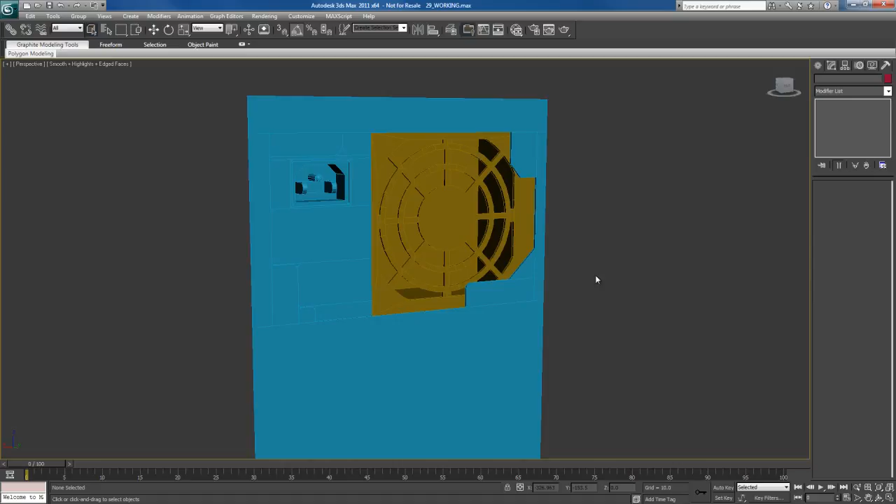Let's go ahead and work on more details here in the back. What I'm going to do next is work on this center rear detail. So basically in the middle of the back area, we've got these sort of panels, I guess, where you would put add-on cards for the computer, like video cards, sound cards, things like that. Then we've got this kind of little vertical grill piece here with an air vent or something like that. So let's go ahead and work on that.

I'm going to select the entire object. This polygon right here, I'm going to start to quick slice that up. So I'm going to activate my quick slice tool. I'm going to separate this in two parts. Basically, one side will be the one with these little horizontal panels, and the other side will be the one with this little vertical air vent area. So I'm just going to place a quick slice maybe about right here. Okay? And let me work on these panels right now.

So what I'm going to do is select this polygon now where the panels are. That's this one. I'm going to go to quick slice. And I'm going to make a quick slice about down here. I'm going to make another one above, about right there. And I'm going to make another one right here on the side, just to kind of separate that. And I'll make another one on this side. So right there. Basically I have this polygon right here in the middle.

And what I'm going to do is go to edge mode and select these two edges there. I'm going to go and get my connect tool. Let me see how many segments I should give it. I'm going to give it about 3 segments. The pinch parameter is throwing me off, so I'll set that to 0. There we go, that looks pretty good. So I'm going to hit OK.

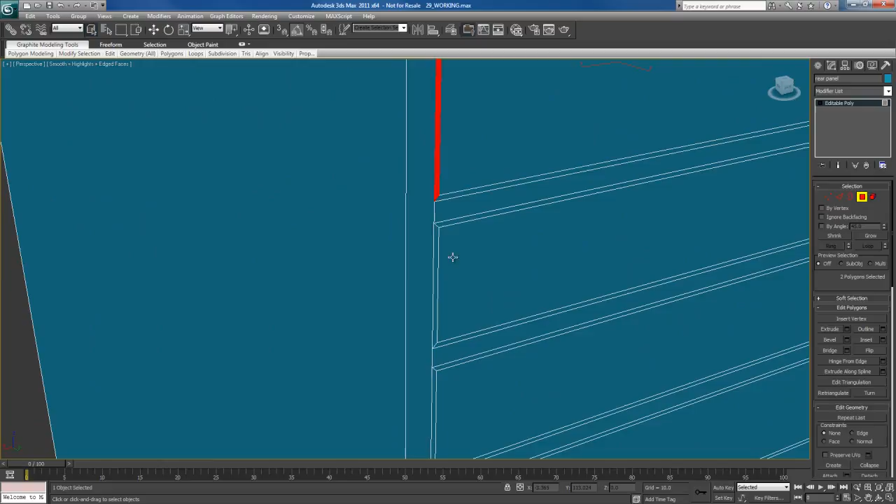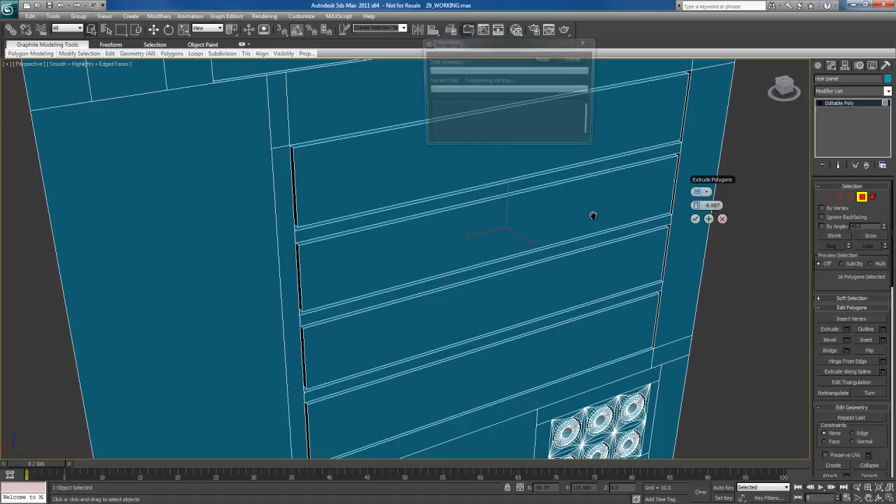I'm going to come in here and select a couple of these polygons there. This one and that one, this one and that one, so I should have all of these polygons selected. Then I'm going to come over here to modify selection and get the entire loop. I'm going to go to extrude, to the extrude options. I'm going to extrude that into the back of the object like this, basically to create those gaps right there. So if I render this out, you see what I have. Basically I have those gaps. I'm going to hit OK.

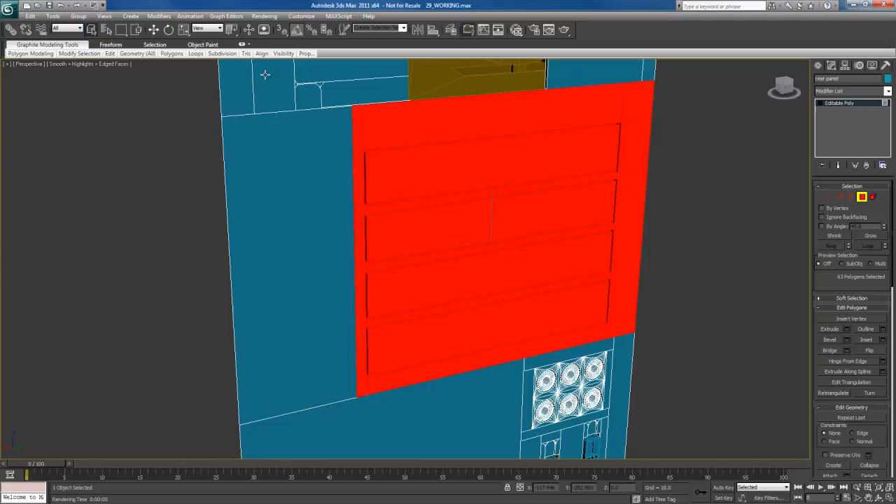Looks like I've got a little bit of an issue in here. Yeah, it looks like a polygon here is not triangulating properly or something like that. So I'm just going to grow the selection of polygons to about right here, I guess. I'm going to go to tris and hit retriangulate, see if that fixes it up. And it did. Alright, so now with that done, what I'm going to do is come back to this view.

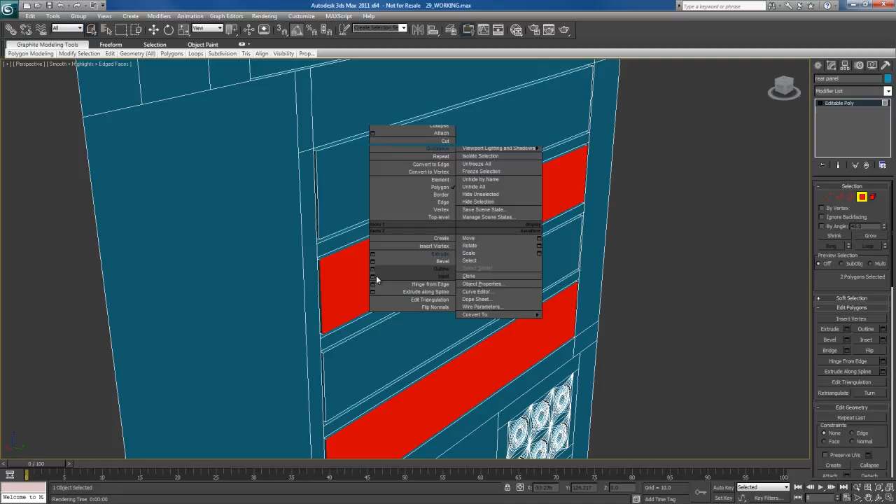And we can see that this panel and this panel are identical. But this one and this one are identical to each other, but different than the other two. So what I'm going to do is select these two guys, and I'm going to come back here, and what I'll do is I'll inset these. I'm going to inset these a lot more. Something like this looks pretty good. I'm going to hit OK.

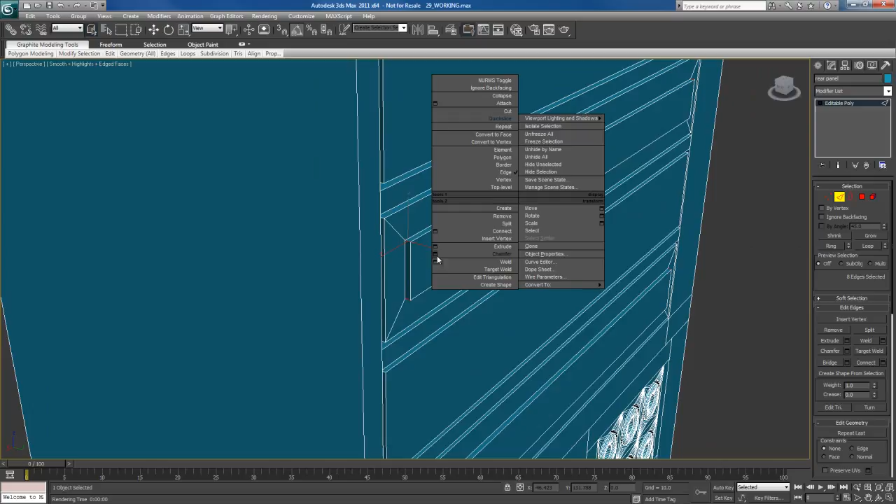Then I'm going to extrude these out just a little bit like this. Then I'm going to go to edge mode. I'm going to select this corner edge right there, and the one for the bottom one right there. I'll hit the ring button just to select the entire ring of edges all the way around, and then what I'm going to do is I'm going to chamfer that. Give this a good amount of chamfer. Maybe I'll try a value of 2.

That might be a bit much. I'll go for like 1.1, looks pretty good. I'll hit apply and continue. I'll do another soft chamfer here, something like this looks pretty good. I'll hit OK and say that I'm happy with that.

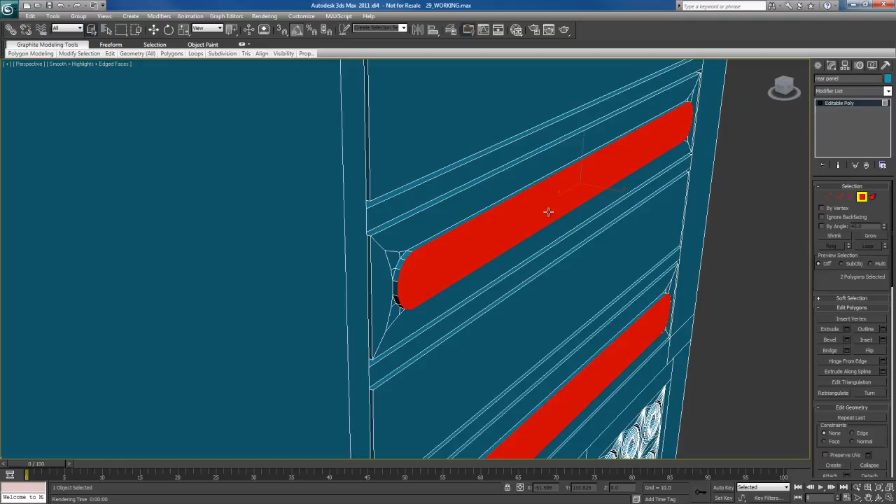And if I wanted to, I could come in here, select this polygon and this polygon, then control click on edges over here in the modify panel so I can get those edges. And what I can do is I can chamfer them. Okay, so I'll chamfer it about this much, give it a few segments, hit OK, end up with something like this. I'm going to go back to those polygons, this one and that one.

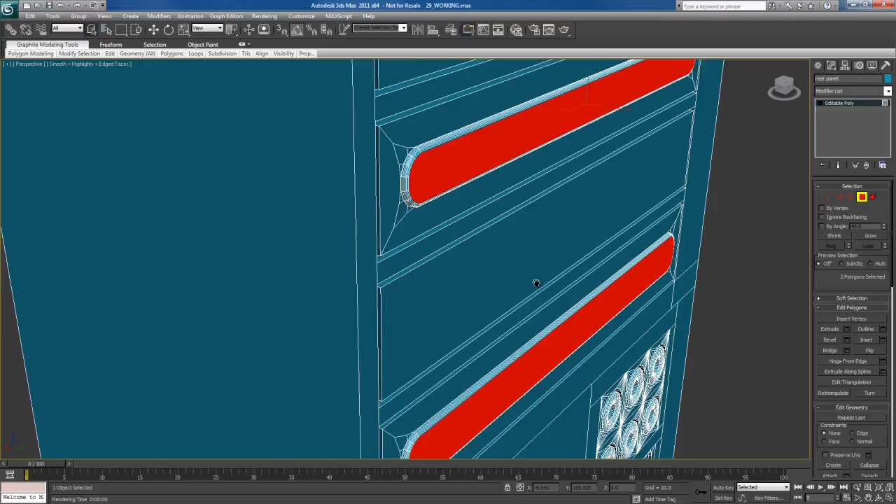I'm going to grow the selection a few times. And then what I'll do is I'll go to properties and hit a smooth 30, just to smooth that out. And I end up with something that looks like this, which obviously looks more interesting than what we had before. So let me go back to this view over here.

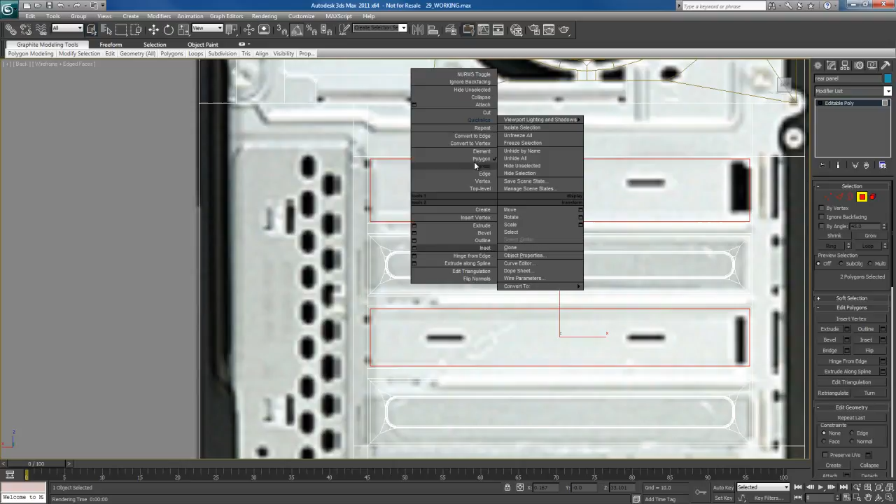Now I've got this polygon up here and this one that I want to work with. So I'll select those two polygons. I'll go to quick slice. And I'm going to make myself a quick slice there and there, just kind of following the reference image here. So I'll make these quick slices there.

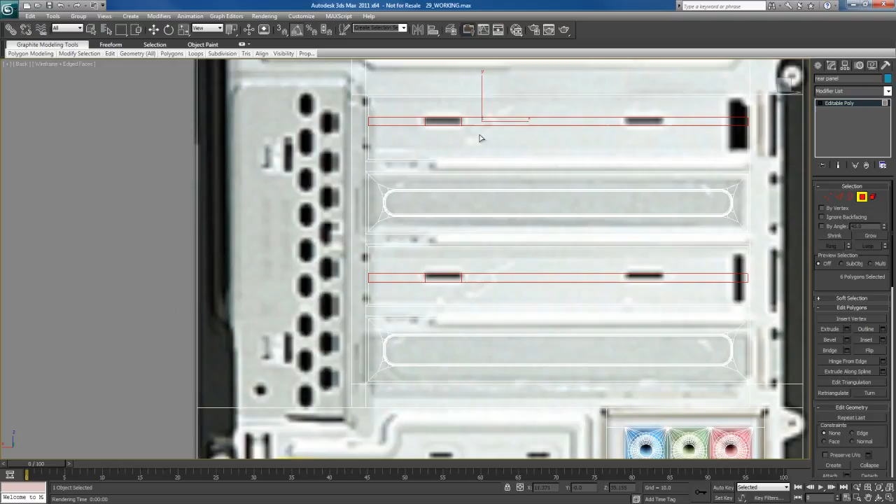Then what I'm going to do is I'm going to select this little polygon, that little polygon, so these two little strips of polygons there. Back to quick slice, and just make some quick slices right here like this. Okay, so once you got that done, I'm going to select these 4 little strips of polygons right there. And I know those have to be holes, so what I'm going to do is Shift E to extrude those things in. I'm going to go ahead and delete those polygons now.

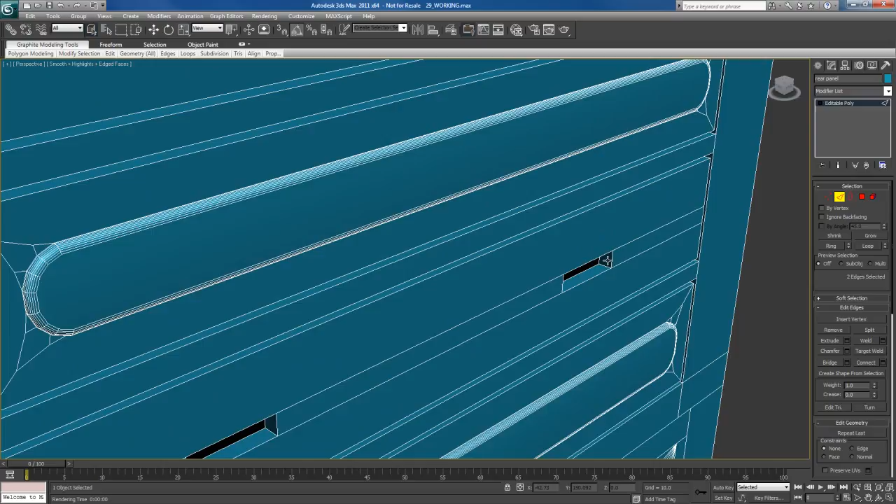I'm going to go to edge mode. I'm going to select that edge, this edge, and select that edge and this edge. Hit the ring button to select the ring of edges for that. And I'm going to chamfer that just a little bit. Give it 1 segment. You can chamfer it as much or as little as you want. I'm going to go for about that much right there, so I have something that looks like this.

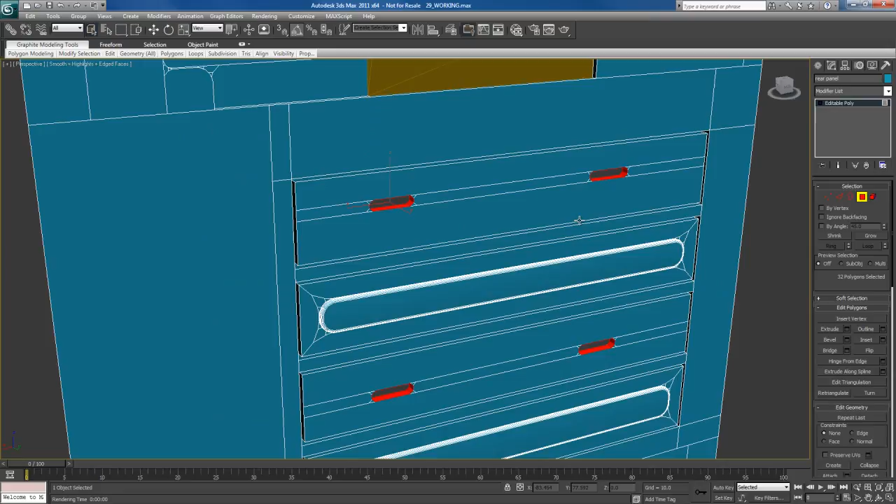Now you can see there's some triangulation errors there, so what I'm going to do is I'm going to select all of these polygons here, and I'm going to go to Tris, hit retriangulate to see if that fixes the problem, and it did. Awesome. So there we go. So those little panels right there in the center rear detail are finished, so I'm going to say I'm happy with that.

I'm going to end this video here, and in the next one we'll continue with the next detail, which is this little air vent right here on the left.